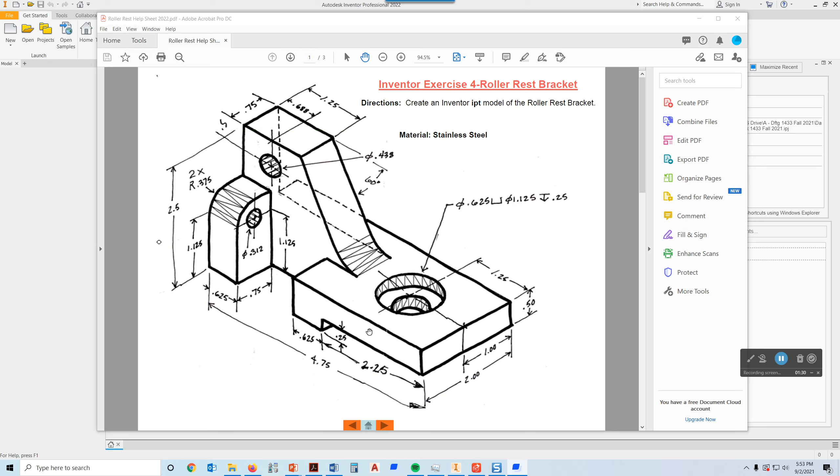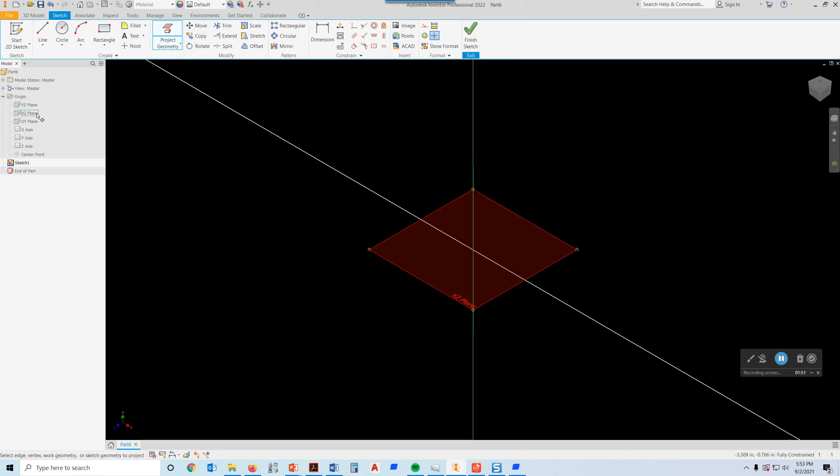Let's pull this out of the way and start a new Inventor drawing. Like we always start, we turn on our origin, choose project geometry, choose the YZ plane, and choose to project the XZ plane, which leaves behind the line that intersects with our XY plane.

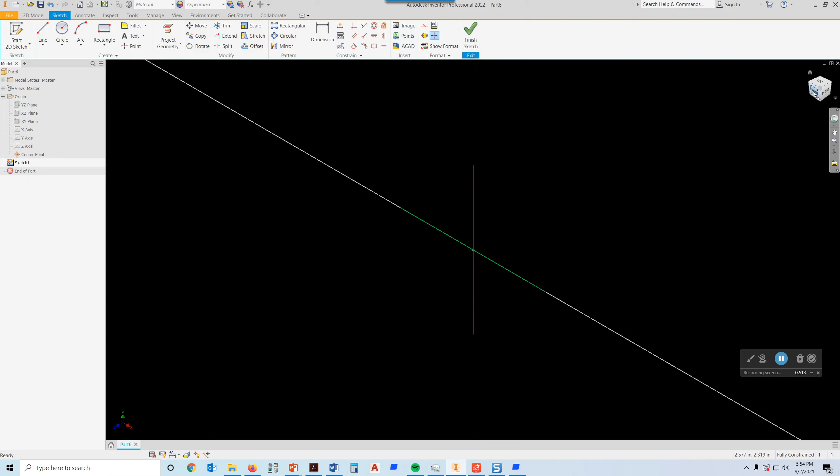So we have our 2 green lines now. If you want to go down to center point, first press escape a couple of times and then right click on center point and choose visibility. At that point we can go to our front view, which puts us normal to the XY plane.

The first thing I'm going to do is draw a line that is the length of the entire object. So I'm just going to go like that. I'm going to type 4.75 and press enter, then scroll out to see where that landed.

Next I'm going to go straight down, making sure perpendicular is showing, and go 0.5 and press enter. I'm going to go in this direction and go 2.25 and press enter. Then I'll go straight down 0.25.

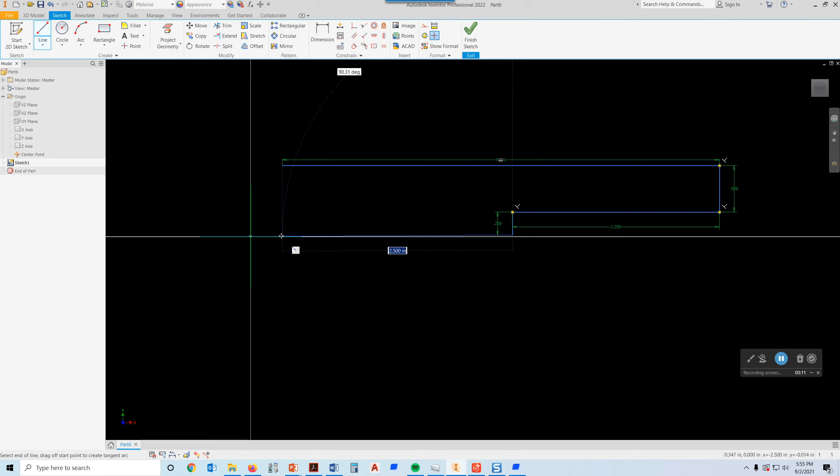Press enter. Then I want to go straight across, in line with the endpoint right here. When I get over there, you'll see a little dropdown - like the tracking point, polar tracking that you get in AutoCAD. All right, I'm going to finish that.

So hopefully it's all a closed shape that I can extrude.

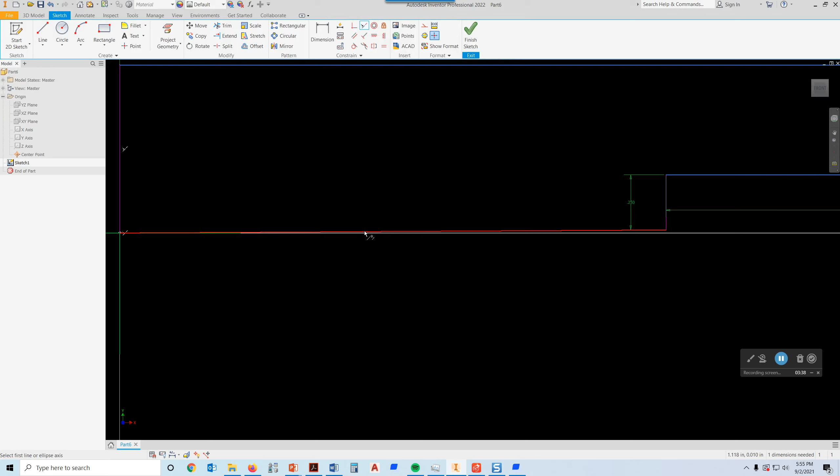Now one of the things I can do is go ahead and do a collinear constraint and pick on this edge right here, and then pick there. I can pick on this shape here and pick to there, making that collinear with that. I believe everything is lined up the way I'd like it to be now - pretty much perpendicular, parallel.

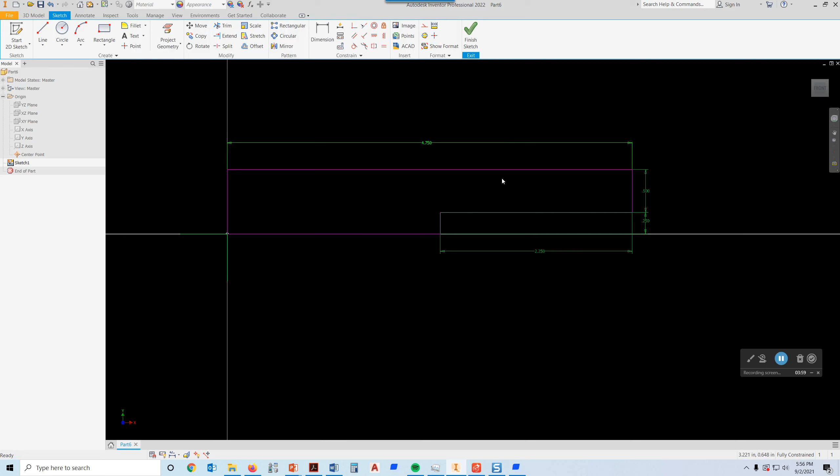I'm going to drag my dimensions out a little bit, and I believe we're good to go ahead and finish the sketch and extrude this. So the extrusion for that is going to be 2, and we can pick OK.

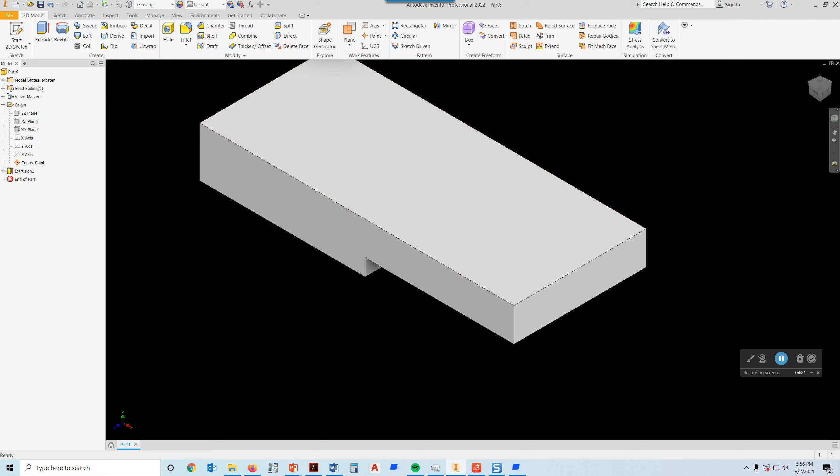The next thing I would do is cut out the piece that's right over here in this area. If we go back, we drag this over, so starting right here there's a cutout. We can determine the length of the cutout based on these dimensions, subtracting those from 4.75.

We can also figure out the depth based on the fact that this plane and this plane are coplanar. So it's going to go in 0.75, and then we just have to determine what this length is.

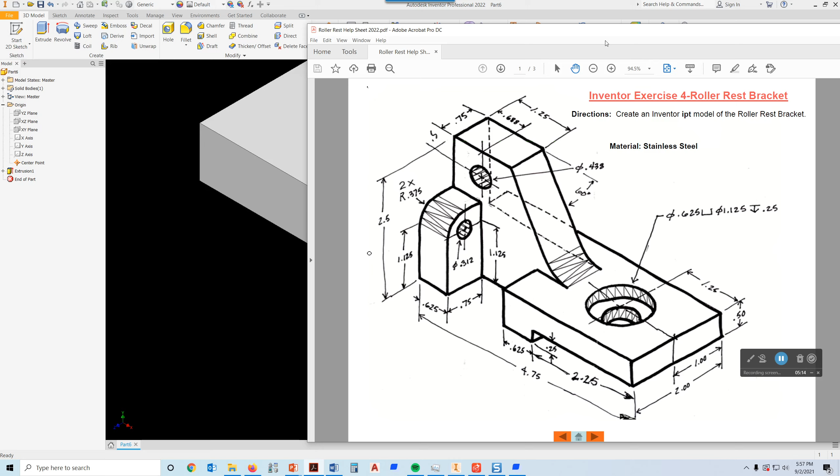Now to get that length right there, when drawing the rectangle, you could type in 4.75 minus, then parentheses, 0.625 plus 2.25, close parentheses, and that would give you that. So let's get started with that one.

We're going to start a new sketch. So we pick here, and then pick on this icon. What we want to draw is a rectangle, so we pick right here. The length of the rectangle, as I said, is going to be...

4.75 minus, and then I'm going to put a parentheses in because I want to add these two things together inside the parentheses, 0.625 plus 2.25, close parentheses, and that should work for that.

So what I need to do is, since it went in there with that, I need to give it - oh, it didn't take that for some reason. Well, fortunately, I realized that all adds up to 1.875.

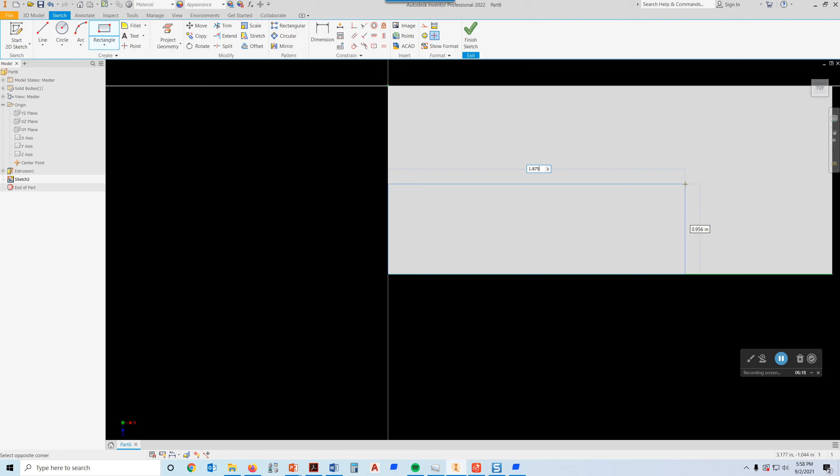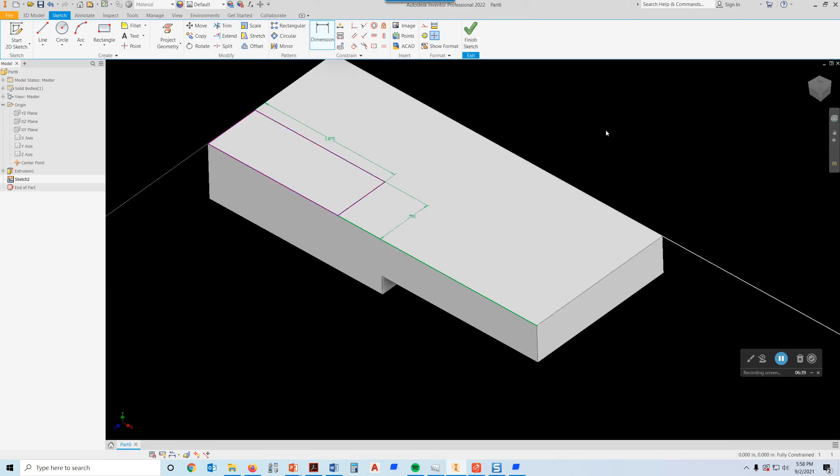I needed to press enter that last time, so I'm going to press enter right there. Now, the thing is it doesn't know how wide, it didn't ask me for that, so I need to put a dimension in right here. The depth of that, I believe we said, is 0.75. Press enter, and at that point we can either finish sketch or just type E and go directly into the extrude command. Obviously we want to flip it because we want to cut that, and the depth really doesn't matter as long as it goes all the way through. Then we just pick OK, and there's that guy notched out.

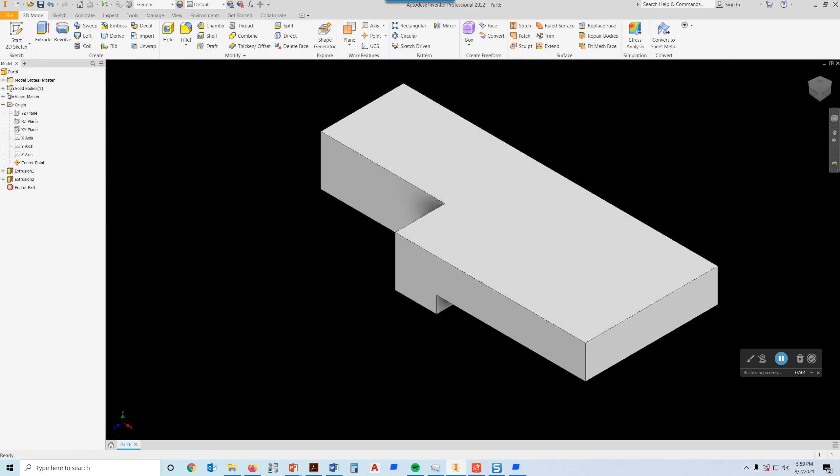All right, so the next thing we're going to be adding to this, let me drag this over, is this shape right up here. The total height of that is 2.5, and it sits on a piece that's already 0.75 high. The distance across here is 1.25. Then we define the rest of it with a 60-degree angle until that angle comes down and intersects with this, and then it goes back and drops down. So that's the shape we're going to draw, and we'll add the fillet to this thing later, not in the sketch. So let's see what we can do here.

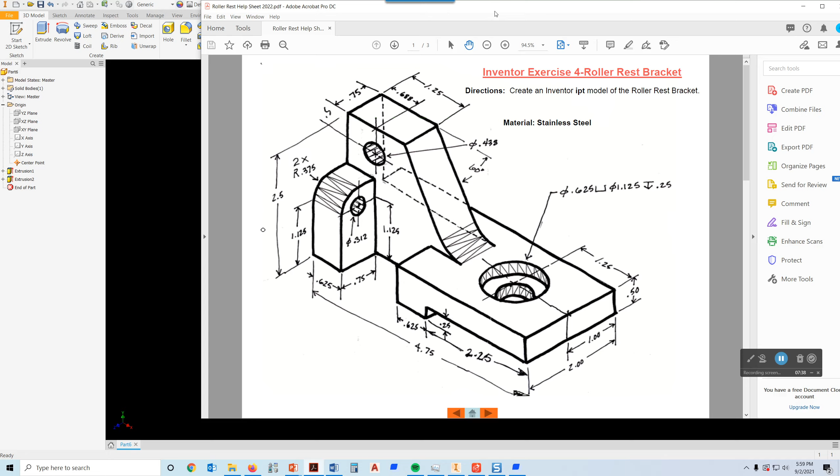Okay, so I want to start a new sketch on that plane right there. I can start a line at this corner and go straight up. What's the distance of that? Well, that's going to be 2.5, which is the overall height, 2.5 minus 0.75, and press enter.

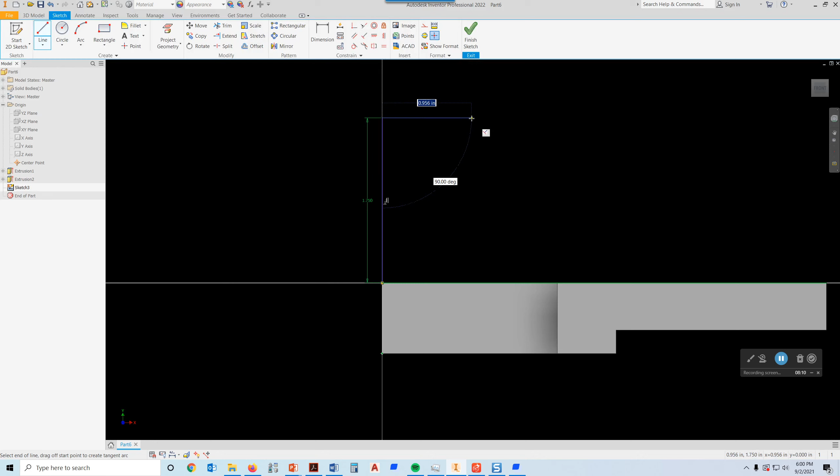Now, the distance across here should be 1.25. I'm going to press enter. Then what I want to do is come down here and land on this line somewhere, it doesn't really matter where. Then I'm going to go back to my endpoint here, and I may have to draw a line to get there. So hopefully I've got that in there.

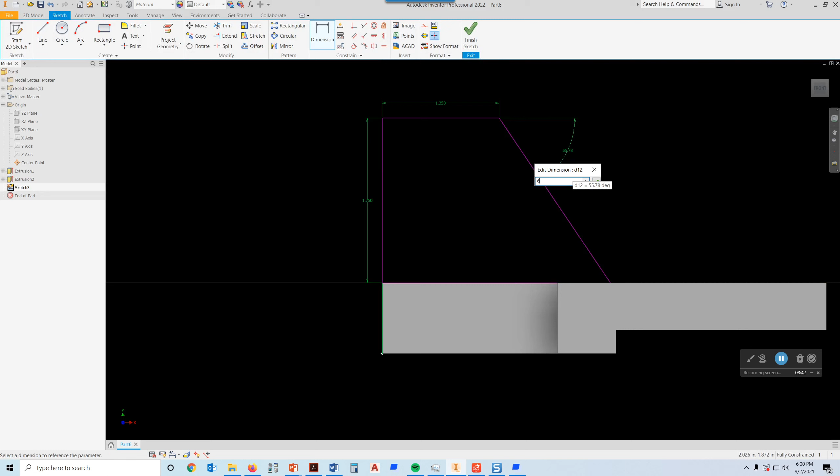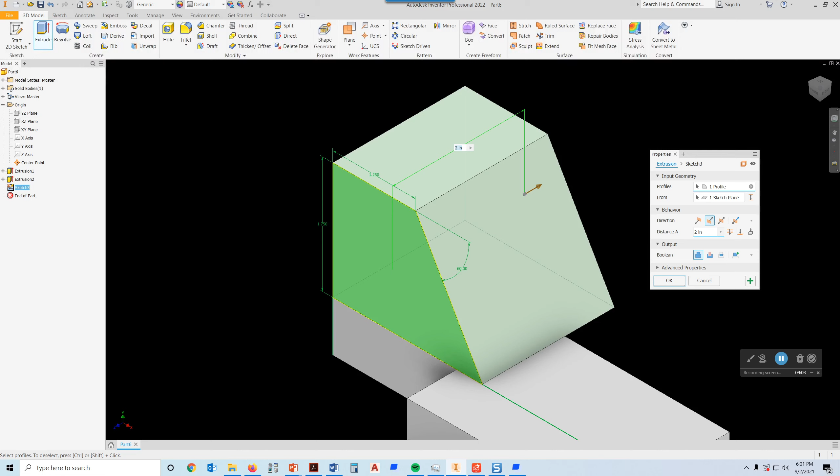What I need to do is add that 60-degree dimension in here. So you pick on dimension, pick the top line, pick on this line, then come out here and type 60 and press enter. You can see that it pulled that back just a little bit. We can finish the sketch and extrude. Let's see if we can get to extrude. Here we go, obviously we're going to go in that direction right there. According to the sketch, the depth of that extrusion is 0.75, and then we can pick OK.

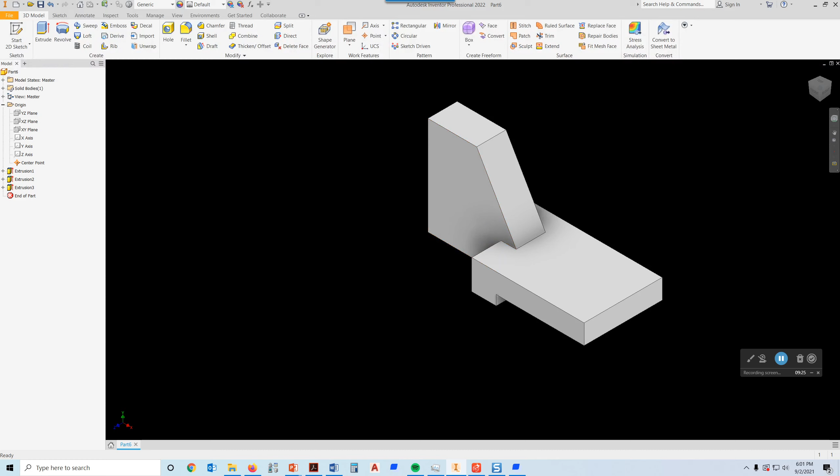All right, so you can see how we're getting this guy put together. The next thing I want to do is draw a rectangle on this surface and extrude it in this direction right here. The size of that is going to be 1.125 high plus 0.375, because there's a radius on that. Let me drag this over. So we have 1.125 gets us to right here, then we have a radius of 0.375, which means the distance from the center to the top right here is an additional 0.375, so we're going to add those two together. The width of this is 0.625, and the extrusion height is going to be 0.75.

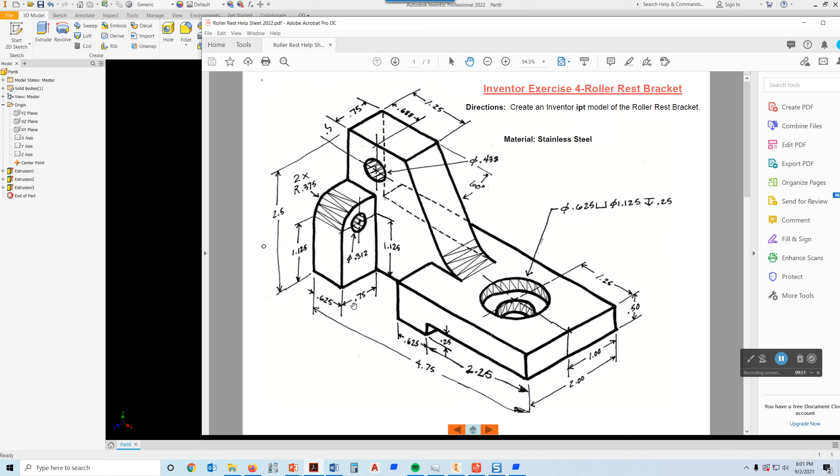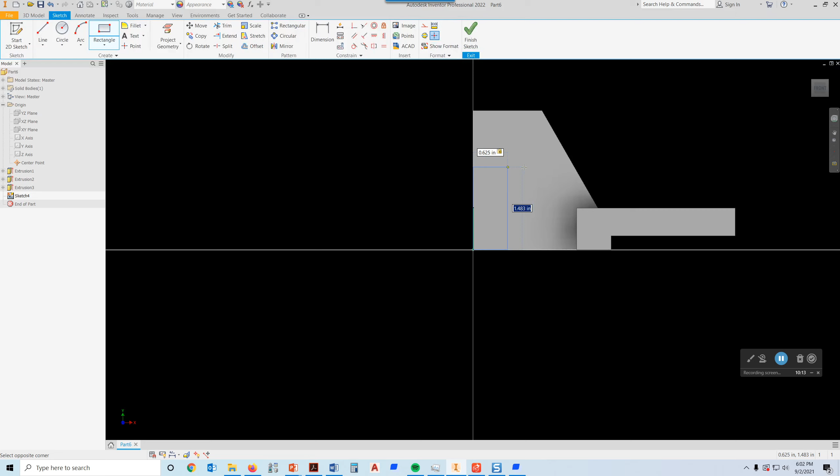So I'm going to pick on this plane and start a new sketch. I'll go to rectangle. I want to start at that corner right there, and I want to type 0.625 tab, and then for my height I need to type 1.125 plus 0.375 and press enter, and that should give me that. So I'm going to finish my sketch and go to extrude.

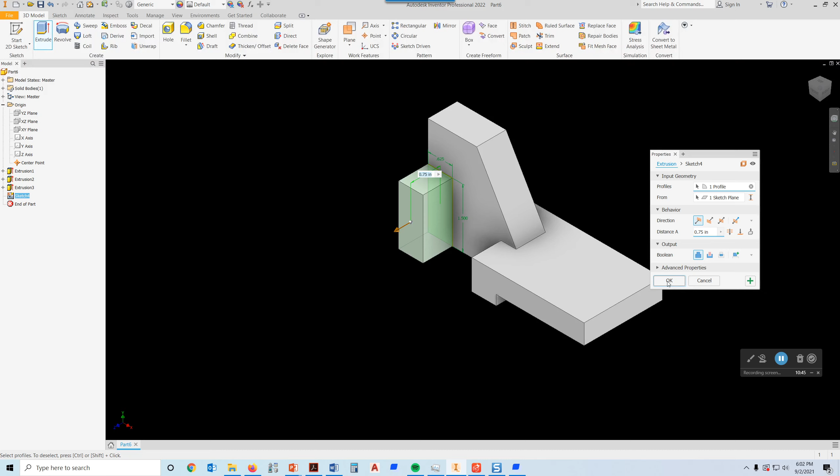Remember, you don't have to finish the sketch, you can just type E and go directly into that. So I want my extrusion distance to be 0.75, and that is already there, and that would make this plane here and this plane collinear. So I'm going to pick OK on that.

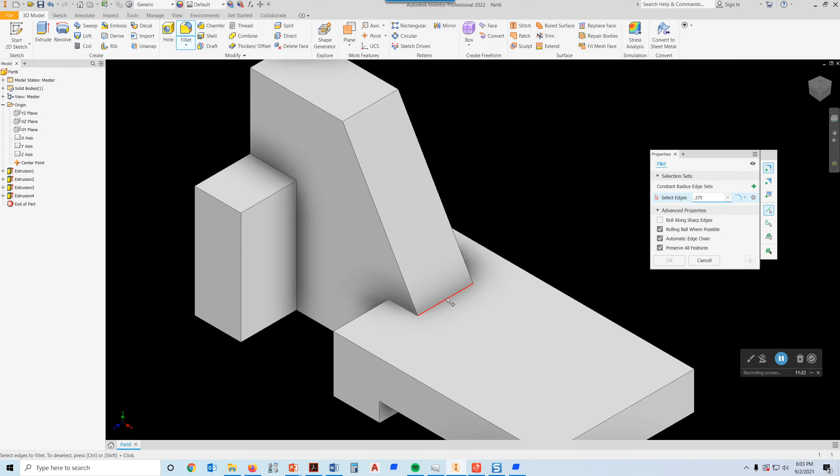All right, the next thing I want to do is add the fillets, and both of those fillets, it says 2 times R.375. So I see that fillet there, and the only other fillet I see is right down in here. So I'm going to go to my fillet command, and right here where it says select edges, and right next to that, that's my radius. I'm going to type 0.375, and then pick on select edges, and come right here and pick on that line right there at the corner where this inclined plane meets that plane, and do that. Then I'm going to go pick on this line right here, which is going to fillet that.

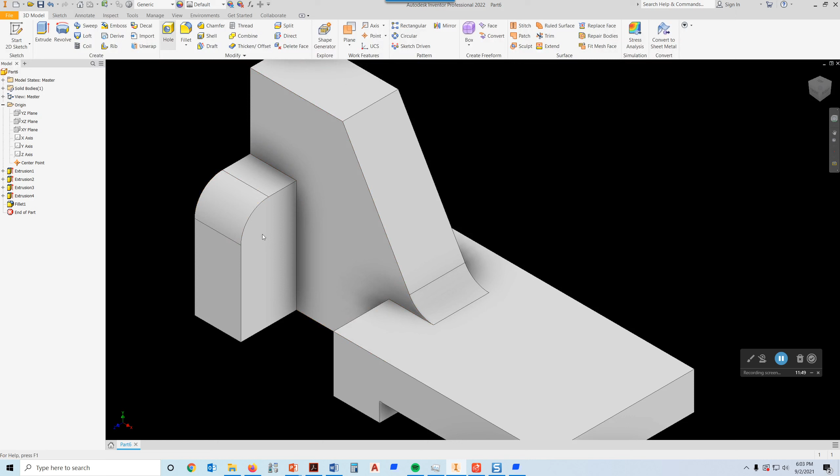Pick OK. Now the good thing about that, when I go to put my hole in here, which is a 0.312 hole, it's going to be at the center point for this fillet right there. So let's just go to the hole command and pick right in here, and let's see if we can get this guy to just snap to... yeah, okay.

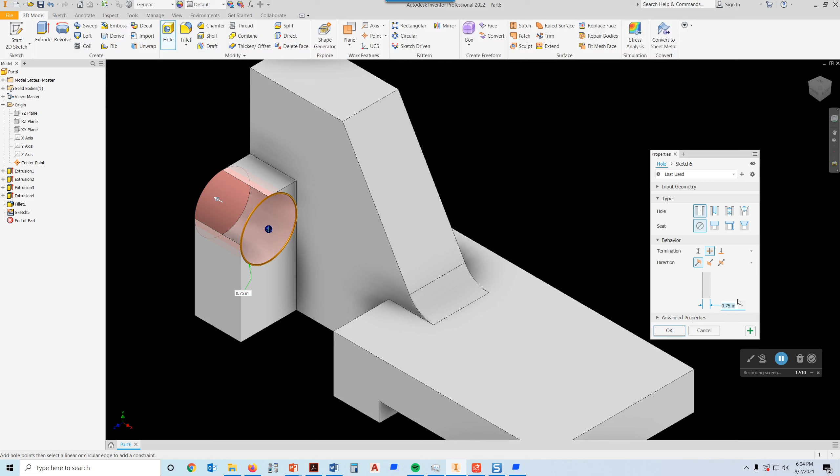So I just picked on that arc, and that centered it on the center point for that arc. Then I need to come in here and change this to 0.312 for my diameter. It's a simple hole and it goes all the way through, so I'm going to pick OK.

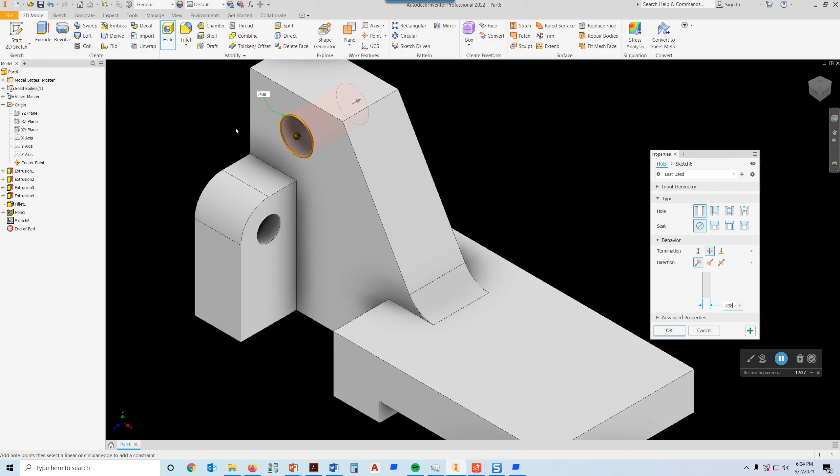Now I need to place another hole here on this plane, and the diameter for this hole is 0.438 according to the sketch. The location of that hole from the top edge right here, I pick at the top edge and type 0.5. Remember, do not press enter at this point, and then from this back edge right here...

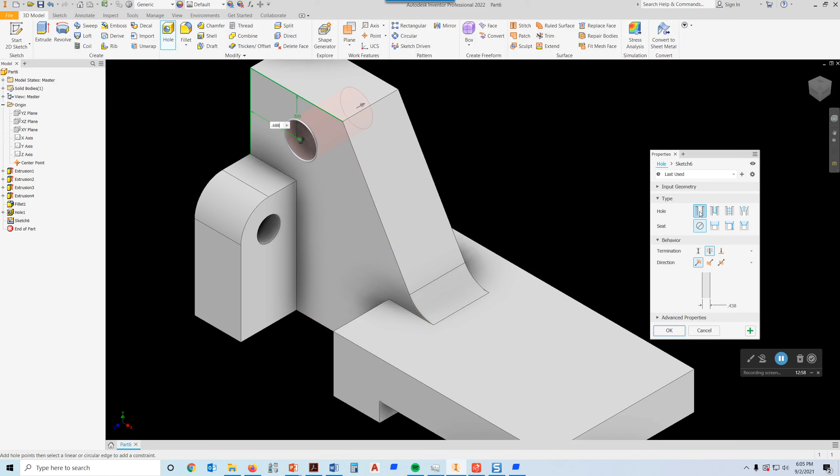0.688. And that moves it, and everything looks good, and I just want to pick OK. I don't want to press enter. I just want a simple hole going all the way through, so pick OK.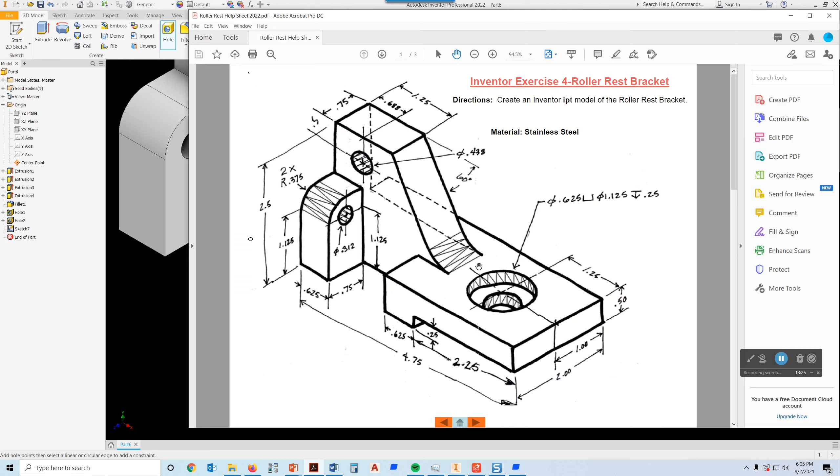All right, so the last hole we need to put in here is going to be on this surface right there. So we pick on the hole command and get the approximate location of where that counterbore hole goes. Let me drag this over. This counterbore hole: diameter 0.625, smaller hole, diameter 1.125 for the larger counterbore, to a depth of 0.25. So I want to define all of that over here. I'm going to pick on counterbore, and at that point go in and change all these dimensions. That's going to be 0.625 right there.

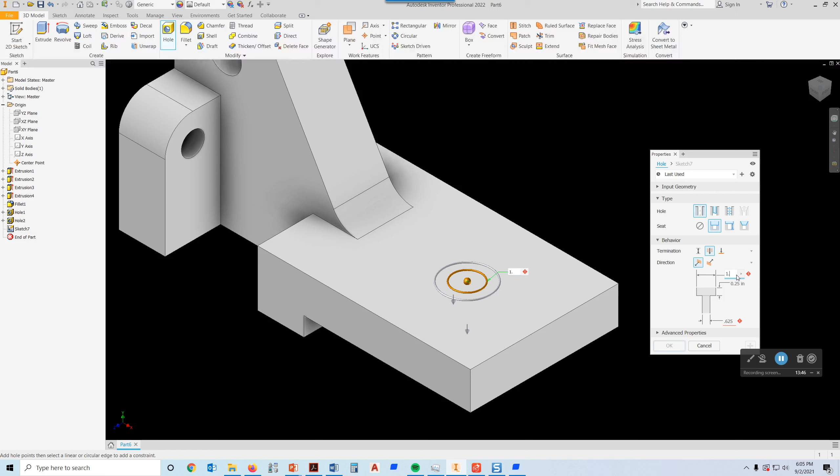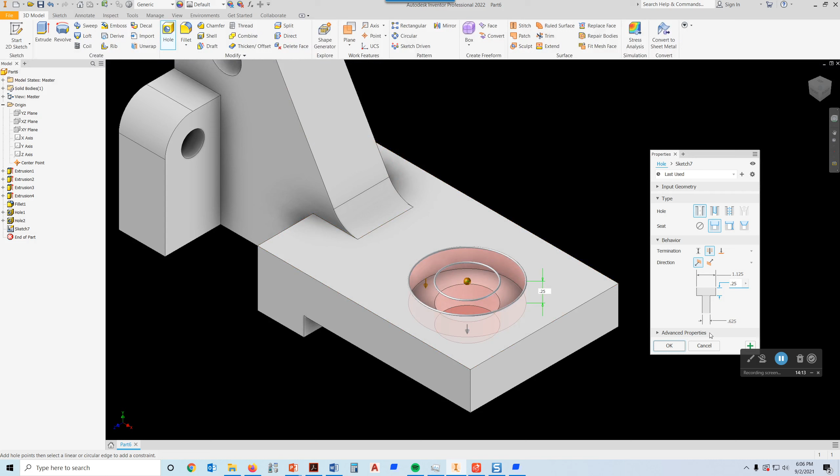The counterbore diameter is going to be 1.125, and the depth should be 0.25. Mine was already saying 0.25. I don't know what yours might say, but so we've got a simple hole through all, with a counterbore seat on it. The diameters of everything: 0.625 for the through hole, 1.125 for the diameter of the counterbore, and 0.25 for the depth. Choose OK.

All right, and at that point, our roller rest bracket is modeled. So it's really simple to do, but it's kind of a fun project.

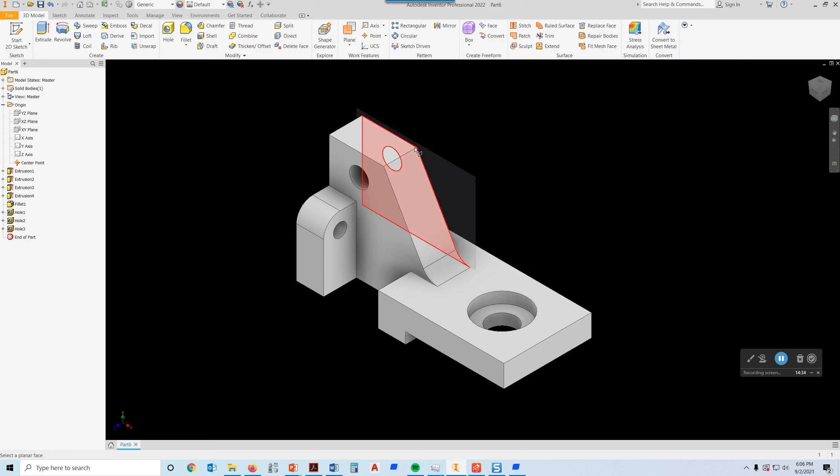Now, I want to show you something though, I'll play with this for just a second longer. Let's do a plane where we offset from a plane, choose right here, go in this direction, and let's just go 3 inches and pick OK. Then let's start a new sketch on that, and go back to the home view. I want to show what you can do. You see project geometry up here?

When you pick on project geometry, if you pick a line in the background or a feature in the background, you can actually project those features to a sketch in the foreground. That's kind of a cool thing that you can do.

Come on, let's see if we can get it. It's going to go in the background there. So you can see that I'm projecting everything up, and that geometry becomes extrudable, if that's actually a word. But the point is that you can put planes offset from something, and you can use the geometry in the background to project out to a plane.

We'll talk more about this, but we can actually do some stuff with this. Just to give you an example, if I do an extrude, and let's say I choose that hole right there, I can go back in this direction and say to next. So next is the option I have here. What it should do is extrude back and hit right there. I'm going to pick OK and see if it builds it. It tells me for some reason it can't do that. I don't know if it's because that guy's hitting in a hole and it's not really finding any geometry there.

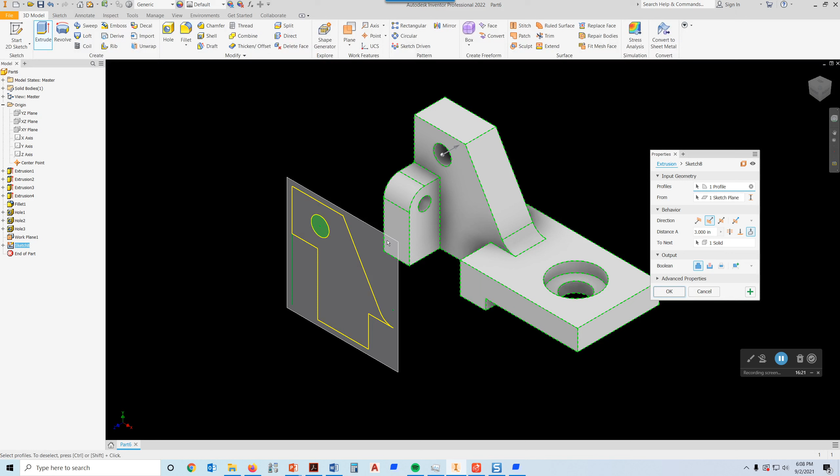But let's see if we can do a different extrusion with this. Let's, for our profile, escape on the profile, do an extrude. Let's choose that, and go back in the opposite direction to next. Okay, you see how that's doing? It's projecting all the way back until it sees the next plane that it hits. So that's just an example of how you can create geometry on a sketch plane or a work plane out here in space, and then project it back to your part.

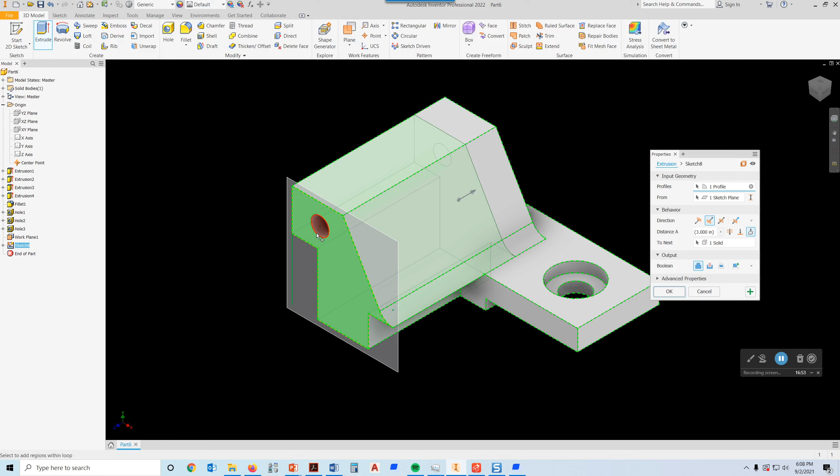And sometimes that's something that we'll need to do. Of course, we don't need to do it on this. So I'm going to delete this work plane out. I don't need that work plane at all. I'm going to pick OK, yes, and get rid of that.

So what I'd want to do is go do a file, save as, and save this as roller rest bracket. There is a help sheet in Blackboard that has all the dimensions and everything you need to draw this guy, but yeah, we want to save it where we saved everything else.

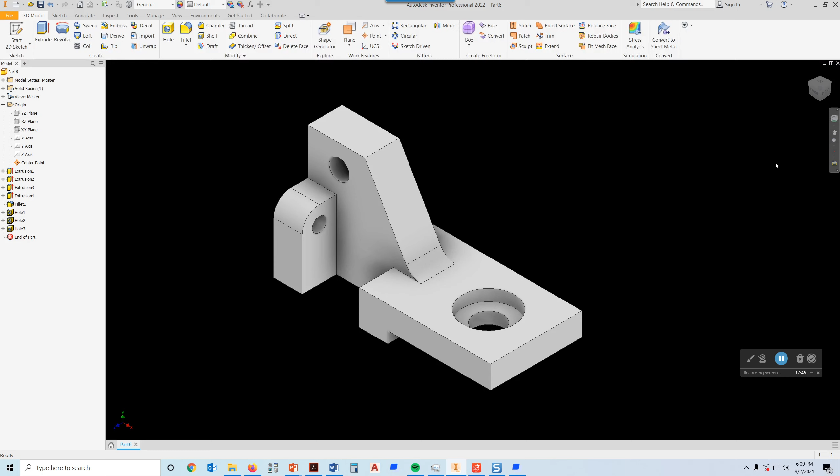And then the next thing we're going to do with this is the next class: we're going to actually open up a sheet of paper, virtual paper, not real paper, that has a border and a title block on it, and we're going to put in all four of the objects that we've created up to this point. Okay, so I'm going to stop the recording right here.